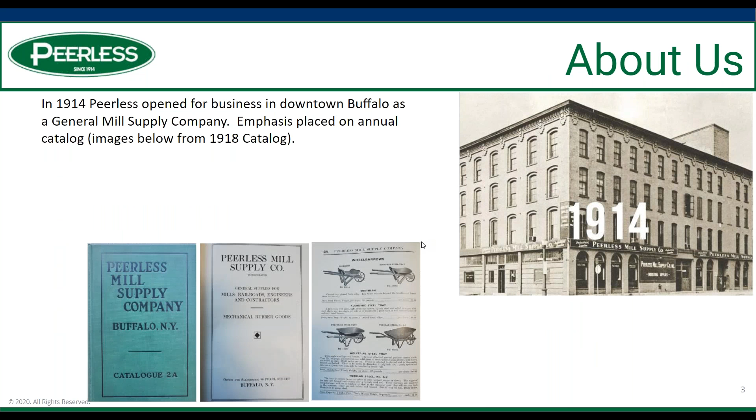Briefly, Peerless opened in 1914 as a general mill supply company, and of course we had to evolve with the times. We are ISO certified now. We've become a trusted source for process components.

We operate under three distinct divisions: our Peerless Process group, which really works with the plant environment, helping plants run smoothly and efficiently, always with a focus on better, safer, faster, cheaper.

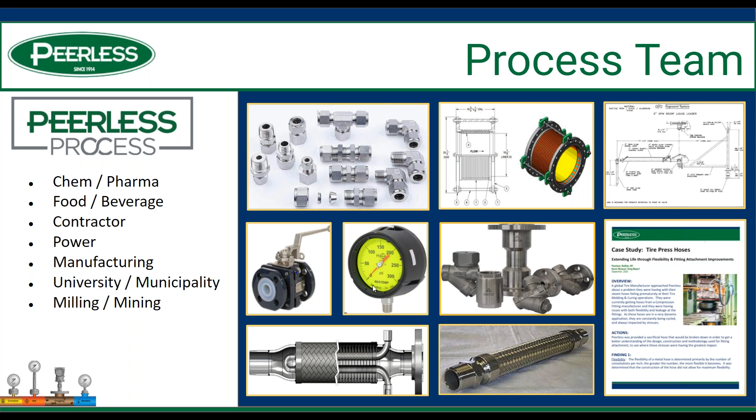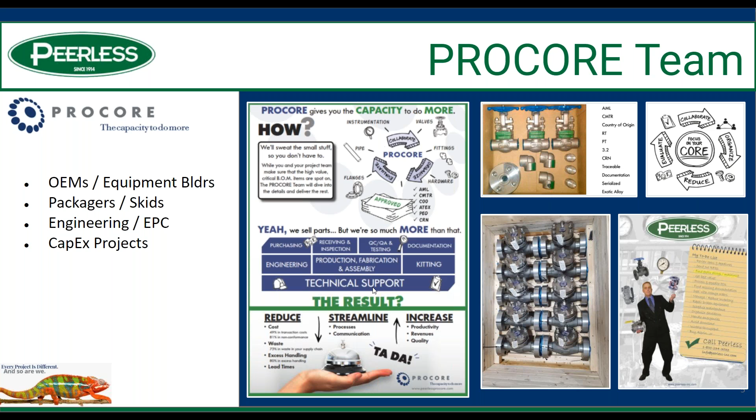We have our ProCore division, where we have a team of engineers that work with our OEM customers on very challenging projects that have many layers of specifications. And finally, we have our high temp fabrication division, where we do a lot of scientific surfaces, laboratory casework, and high temperature insulation.

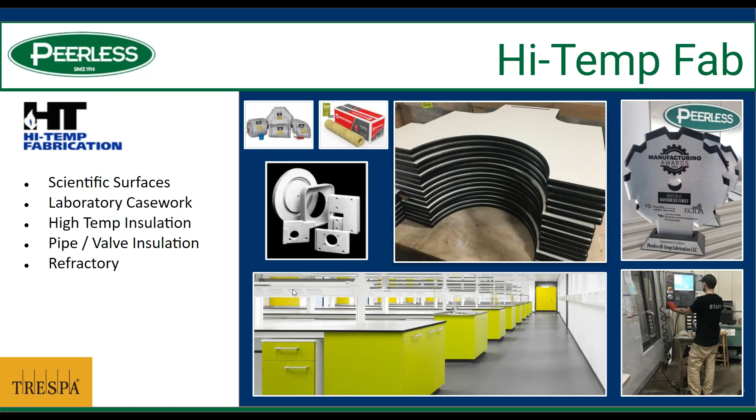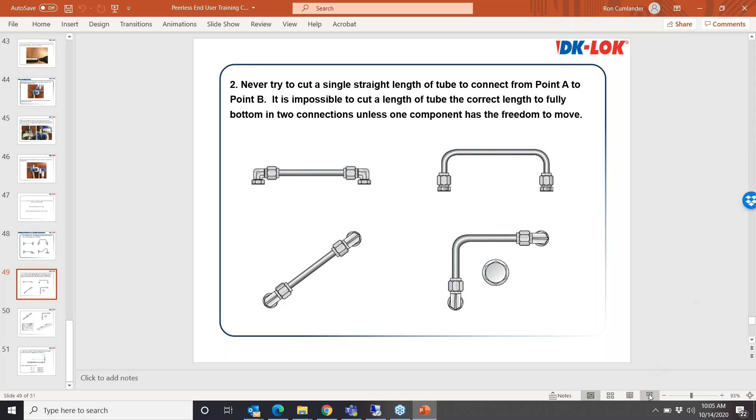I do apologize for not having provided Kevin a better mug shot there. Actually, I serve as Executive Vice President at DK-LOK here, and also handle their technical issues. So hopefully the information that I present to you today will be beneficial to you.

There's a world of information for this type of product, as far as the things that we're going to be covering today. So this is the basics. Feel free certainly to send your questions in to Dan, and we'll try to address those as we go through here.

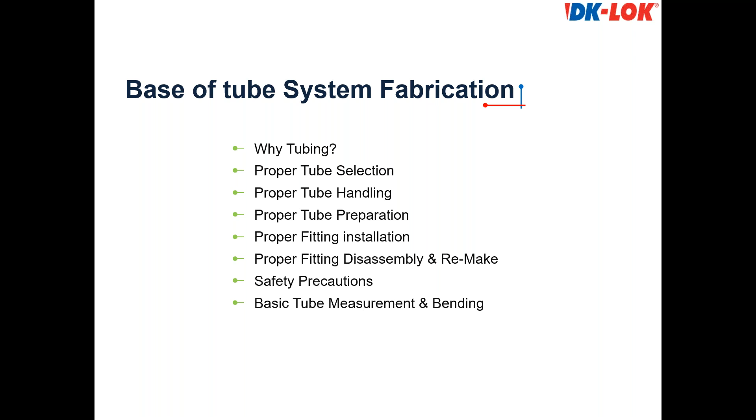The itinerary for today's meeting is why use tubing, proper tube selection, proper tube handling, proper tube prep, proper fitting installation, proper fitting disassembly and remake, safety precautions, and basic tube measurement and bending.

There are two types of instrumentation fittings out there on the market that are prevalent: a single ferrule design, as you see on the right-hand side, and the two ferrule design, as you see on the left-hand side. Both of these designs are available in 1/16 of an inch OD through 2-inch OD, and also the metric comparables of 2 millimeter through 50.

They, in the appropriate alloy materials, are heat code traceable. They are reusable from the standpoint that you can disconnect and reconnect the connections once they've been made up initially. Some of them present a gaugeable feature, and most manufacturers roll their male threads on their connectors for strength rather than actually machining them, especially in the 1-inch and under sizes.

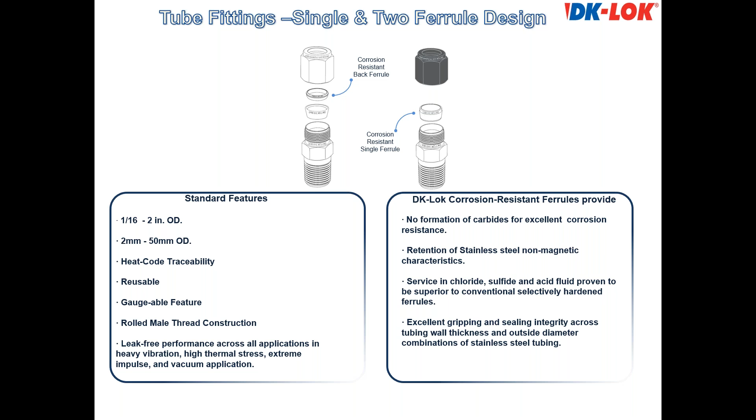Many manufacturers today provide their ferrules with some type of hardening process. Some have a hardening process that maintains the natural corrosion characteristics of the base metal. There are others that still use hardening processes that present some carburized material, and subjected in certain applications, such as salt spray or even Clorox bleach type entities, there could be some corrosion due to the degradation of the stainless characteristics of the metal. So that's basically what we have as far as these designs that are out there in the market.

More specifically, the two ferrule design is a geometric design. What you see here is the 4 components exploded in a male connector. There are specific angles for the particular parts because in this geometric design, all of these components are machined and designed to work together, just like the stem tip of a valve and the seat of a valve work together for complete shutoff. We'll talk about that a little bit more as we go through this presentation.

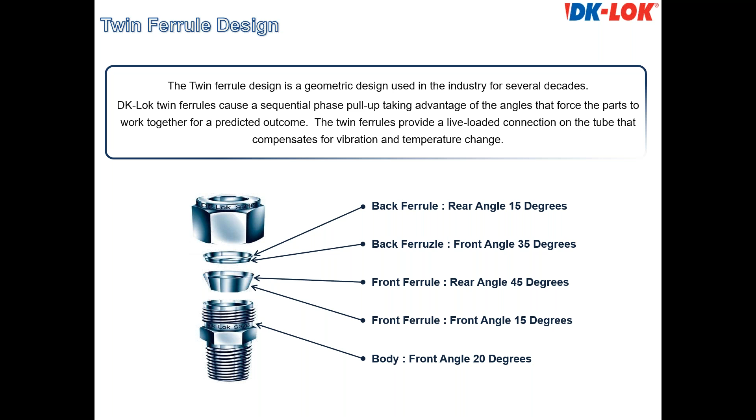In the installed position, the two ferrule design provides a live loaded connection that compensates for vibration and temperature change, which are the two main causes of leakage in any installation environment that tube fittings will be subjected to.

The single ferrule design is only a 3-piece component here. One of the reasons the nut is black is because it was found by the brand that made the single ferrule more prevalent back in the day, which was Parker Hannifin. This would be their CPI brand fitting.

They found that a moly-coated nut tended to do a better job of reducing the torque during the pull-up. So that's why you see a black nut on the single ferrule in some of my photographs, for that particular reason. Most manufacturers that supply a single ferrule do offer the option of an all stainless nut because a lot of customers, from a cosmetic standpoint, just don't like the black nut. So you can have either option there.

A lot of people ask us, what is the difference between single ferrule and two ferrule? I'll explain that by explaining how the single ferrule design works. It works by shear deformation. As you tighten the nut, it drives the single ferrule leading edge into the body bevel of the fitting. By sheer force and deformation, the leading edge of the front ferrule is forced to deform to match the contour of the body bevel of the fitting port itself. It works much like a cork being forced into the mouth of a wine bottle. The cork simply contours to the mouth of the wine bottle for a seal, and that is very similar to how the single ferrule design tube fitting works.

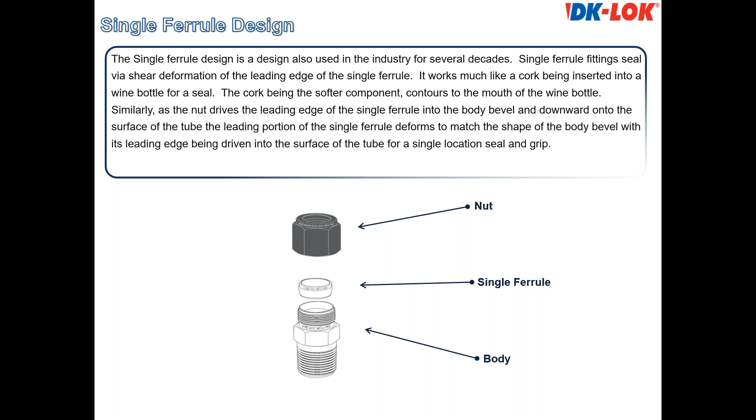The two ferrule design is much different. When these parts are finger tight, the fitting works by inserting the tube in tight against the shoulder, just as you would with the single ferrule. As you tighten the nut, it drives the back ferrule into the back of the front ferrule, which drives it into the body bevel, and through the tightening of the nut, pushes the front ferrule down the body bevel. Because it has a long, thin, tapered leading edge on the front ferrule, the deformation is minimal, and there's only a slight difference in angle between the body bevel and the front ferrule. So it's made to work.

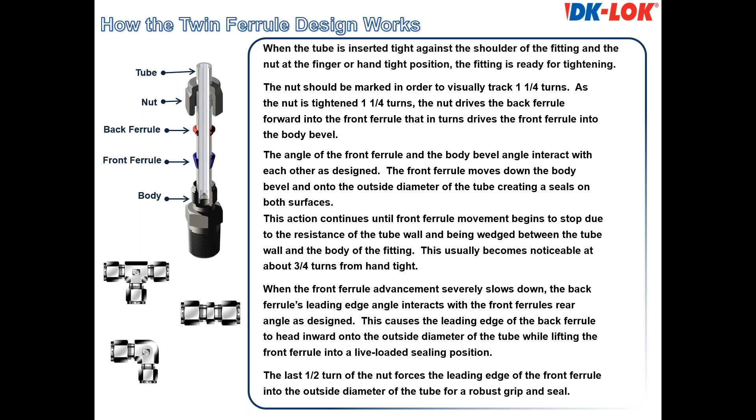Once the front ferrule's forward movement is retarded or stopped by being wedged between the body port and the OD of the tube, the back ferrule honors its leading edge angle and the angle machined into the back of the front ferrule, and dives inward onto the tube at a 45-degree angle to deliver maximum bite depth to seal against high pressure gas and provide grip against blowout. So the two ferrules work together very well, and in the installed position at 1 1/4 turns, it's a very live loaded position because the back ferrule lifts the front ferrule out into a complete sealing position against the body bevel itself.

Yes, sir. Just a reminder, you may want to use the laser pointer feature while talking about these, to point out anything while you're going through this. You got it, thank you.

Okay, I'll keep this down in the right-hand corner. Most manufacturers out there, especially for the two ferrule design, because of the controlled pull-up, the parts are predictable because of their dimensions, tolerances, and the travel on the threads. They use gap inspection gauges as a way for the installer to check for proper tightening. This is an example of a gap inspection gauge, typically referred to as a no-go gauge, and we'll talk about that further along.

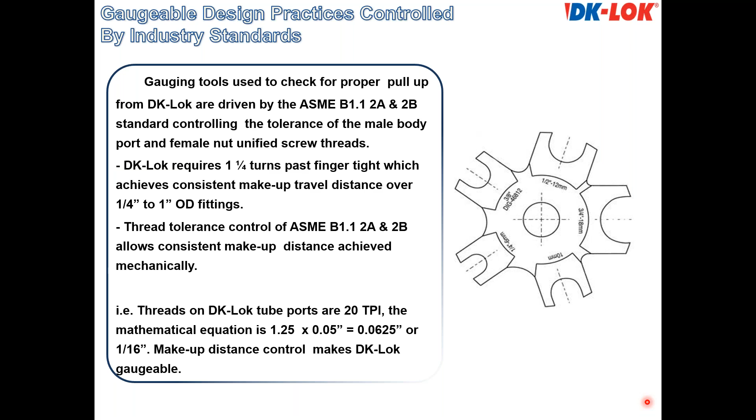We're still tightening the nut on both connections 1 1/4 turns, regardless of the wall thickness of the tube. So when the front ferrule stops a little sooner because of resistance in the heavier tube, and we're still going 1 1/4 turns, something has to absorb that change in travel, and the back ferrule does that. It receives that change in travel from the front ferrule by bowing or squatting as the nut continues to drive it forward to the 1 1/4 turn position. So the installation procedure does not change for the various wall thicknesses available for any specific OD.

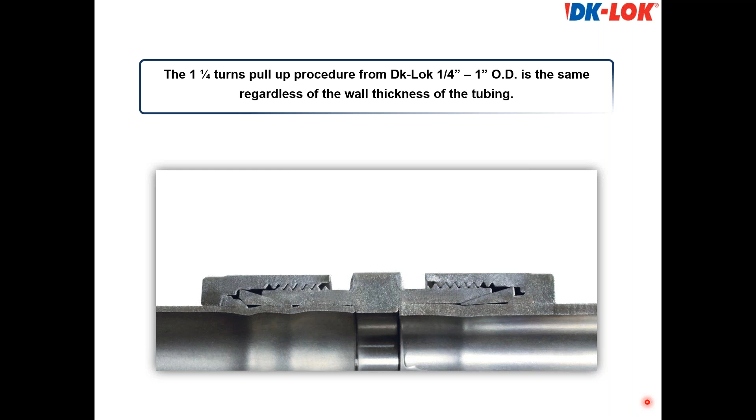So through the pull-up, we want to close the gap between the body bevel and the front ferrule, and maximize this sealing area as much as possible. Through another 1/4 turn on the nut, we're continuing to force the front ferrule down the body bevel and onto the OD of the tube. At the 1/2 turn, if we were able to disassemble this and take a look, the back ferrule is not even attached to the tube at this point. It's simply acting as a bearing disc or thrust washer to take the torque out of the pull-up and push the front ferrule forward.

At 3/4 of a turn, we're continuing to move the front ferrule down. We continue to move the front ferrule down, and about 3/4 of a turn, based on the wall thickness of the tube, is about the time during the pull-up that the front ferrule starts to really stop its forward movement because it's being wedged between the OD of the tube and the body port.

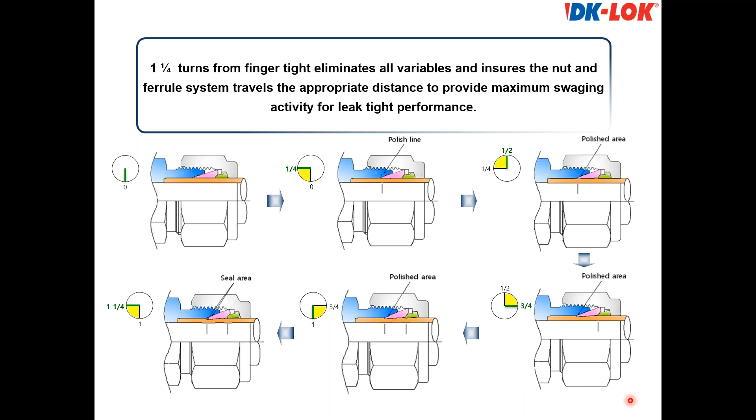So we need to complete that, and that last 1/4 turn is what really delivers the bite depth and the grip of the back ferrule into the OD of the tube, drives it under the front ferrule to lift it outward in a live loaded position against the body port. So that's basically what takes place during the pull-up of the 2 ferrule design fitting.

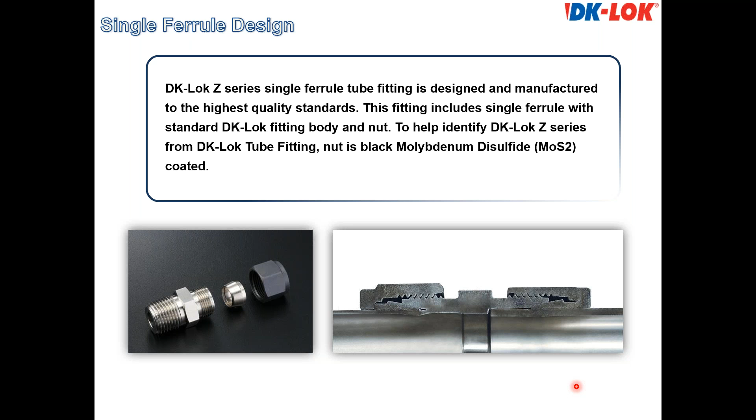Over here, it looks like the ferrule is kind of flattened and straightened out, much like the front ferrule of a 2 ferrule design, because this tube wall is so heavy, it's giving much more resistance, and it just basically stops the forward movement quicker and kind of flattens out that arc in the single ferrule. So that's the difference between the 2 ferrule and the single ferrule design. They both can be used on various wall thicknesses, but by far, the 2 ferrule design is the most prevalent and the most dominant preferred design in the field globally today.

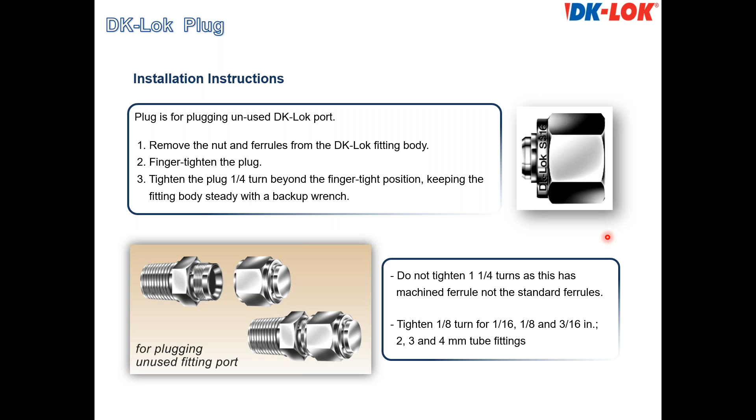So you just take this plug, screw it onto that unused port to the finger tight position, and with the proper wrenches you would tighten that plug a quarter turn, and that would seal off that port and allow that T or that unused branch line to be available if you wanted to reconnect in the future. So again, we plug a port and we cap a tube. That's the verbiage used in our industry. Again, we cap a tube and we plug a port. So that'll help if that confuses anybody.

Hey, Ron. Yes. Sorry to interrupt.

Just a quick question, or maybe more of a point of clarification on the pressure rating chart you showed a couple of slides earlier. Before we get too far past it, maybe you can work back. So just to clarify, the tube fittings you'd be using alongside tubing of a particular OD and wall thickness—the tube fitting itself is designed to meet the maximum possible working pressure that the tubing it's coupled with is rated to. Is that correct? Okay, that's an excellent question.

We get the question all the time of what pressure rating your fitting is rated to. And the way to answer that is simply this: our fitting is rated to the working pressure of the tube and will hold to the burst of the tube when properly installed in accordance with manufacturer's instructions. But to rate the fitting's pressure depends on the connection ports in that configuration.

So let's say you've got a half inch tube by half inch female NPT straight female thread connector. Even though the compression side would be rated to 6,200 PSI with a 4-to-1 safety factor, the lower rated end connection would be the half inch female NPT. So you have to rate the fitting's capability to the lowest end connection's pressure rating.

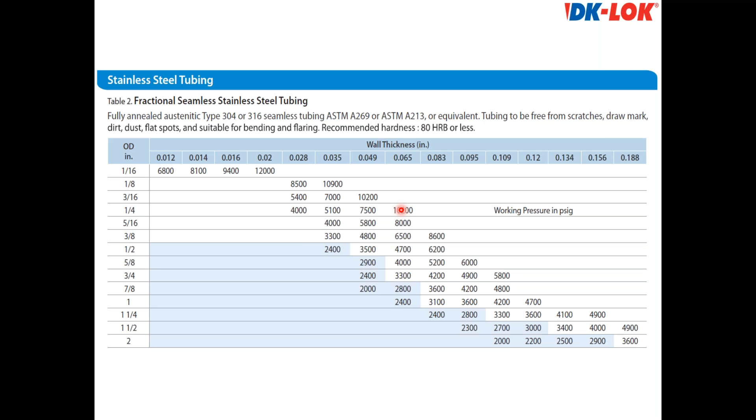Back to these pressure ratings, a 1/4 inch union T with compression all the way around would be rated to 10,200 PSI because all 3 compression ports would be rated to the working pressure of the tube. But a female branch T with compression and 1/4 inch female NPT would be rated to the NPT pressure rating for 1/4 inch female NPT in stainless steel. So the fitting is always rated to the lowest pressure rated end connection on the configuration.

Thanks, Ron. Here's another adapter that will make your life much easier. It's called a port connector. It's machined from bar stock, and because it is bar stock, it has the same hardness as the ferrules, since they're machined from bar stock as well.

So for the ferrules to perform properly on the port connector's tube stub side, a simulated groove is machined into the port connector so the leading edge of the front ferrule will find that groove as a home and seat into it, and the front of the ferrule will stop on that shoulder. The purpose of a port connector is simply to allow you to connect 2 compression ports very close together to save spacing, without going through the frustration of cutting a very short piece of tubing.

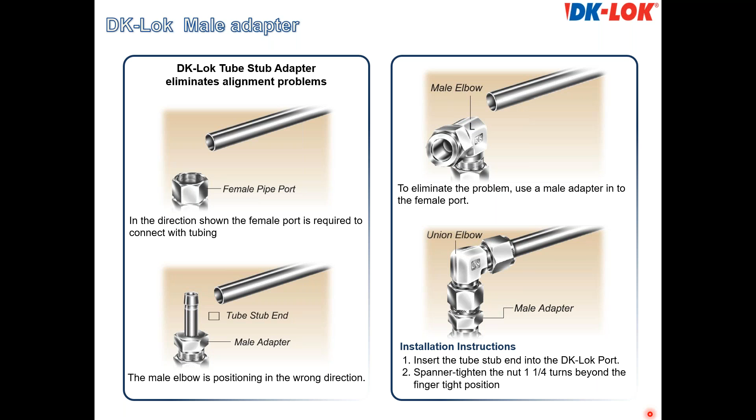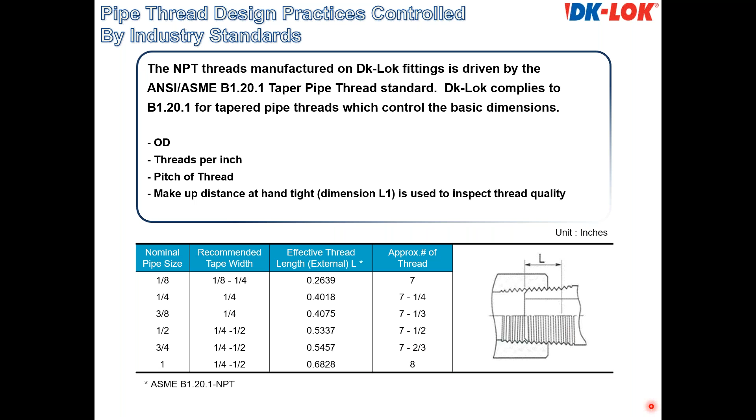NPT threads are dictated by specifications, ANSI and ASME B1.20.1 tapered pipe thread spec. For 1 inch and below, most all tube fitting manufacturers cold roll their threads—they don't machine or cut them, but form them through thread rolling machinery and hydraulic pressure. It's pretty straightforward. The important thing about cold rolled NPT threads is that they're formed properly.

The way NPT threads seal when mated together is they seal on the flank. This would be considered the crest, which I call the mountaintop. This is the root, which I call the valley. And this is the flank, which I call the slope. As long as NPT threads are made to spec, with the crest truncated off flat and the valley also truncated off flat, NPT threads typically don't give you any problem because they seal by interference with each other on the flanks.

If you don't have properly truncated threads, those little tips, if too pointed, will hit into the valley of the mating thread, and those thin tips in stainless steel will heat up quickly, and that port will gall immediately. Stainless steel is a little finicky, so it's really important that high quality threads be produced on compression fittings, properly formed so you don't have galling issues whatsoever.

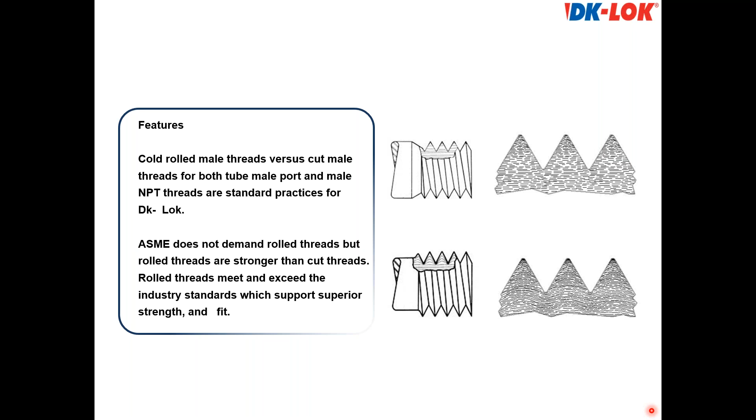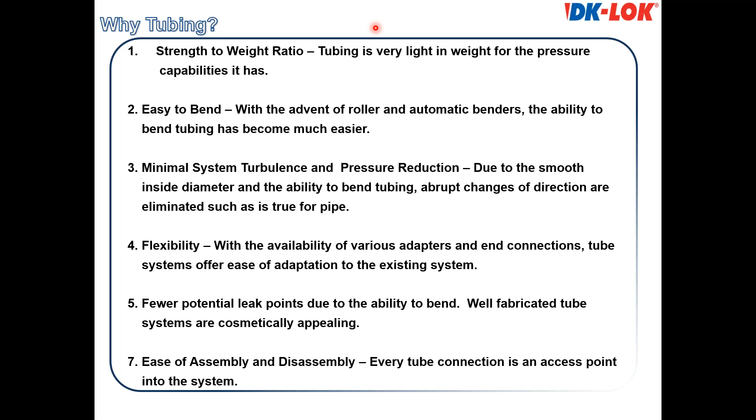And the flexibility of the system—you can adapt with Teflon braided hoses with tube stub ends and go right into a tube T and a tube system, and go to a hose easily. You have fewer leak points, and then you always have maintenance: you can make and break and disconnect on every nut and ferrule connection in the system and access it to do whatever you need from a maintenance standpoint. But back to the comparison to pipe.

Here's an example, and this piping comparison actually shows a sweeping 90 rather than an abrupt 90. I wish I had an abrupt 90 in this picture, because that would further emphasize that when you have abrupt 90s in a piping system, those cause pressure drop. Sweeping elbows don't tend to cause pressure drop, and with tube, you can bend it without needing so many fittings and leak points.

If this were a welded system versus tubing, you would have to have a burn permit, a skilled welder, and in some cases, you'd have to have x-ray. Then you sometimes have to do flushing. You have to do all types of things if this were a welded system.

In small bore piping systems, because we have tubing and tube fittings available up to 2-inch, our larger fittings, 1-inch and above, are great cost savings alternatives to small bore piping systems that are welded or even threaded. If you can bend conduit, you can bend tubing, and tubing is much easier to field route anyway. So there's a lot of advantages in using tubing versus pipe, especially in small bore piping systems.

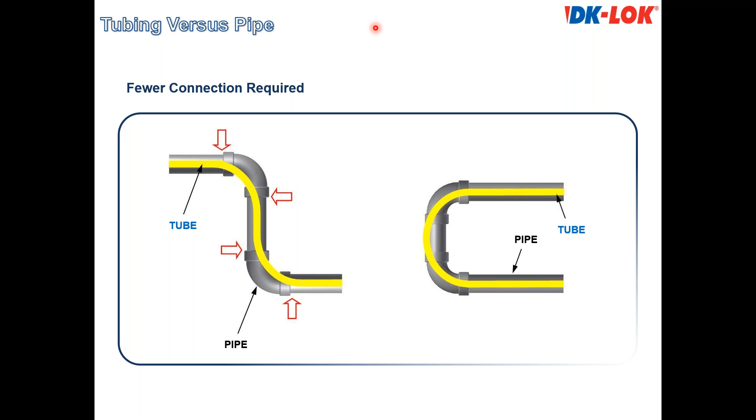When selecting the proper tubing, you have to take a few things into consideration: the proper material—stainless steel is by far the most common material we deal with—the size, and the wall thickness for your pressure requirements. Every manufacturer lists suggested ordering information for the material you may be considering. For stainless steel, it's fully annealed, 304 or 316 seamless, A269 or A213.

You always want to make sure it's free of scratches and flat spots. Everybody recommends RB80 or less, not because the fitting won't work above RB80—most manufacturers will state their fitting will work to RB90—but the reason we recommend RB80 or less is simply from a workability standpoint, to be able to bend and work with the tube to create your systems. It just makes fabrication easier if it's RB80 or less.

One thing I'll mention before leaving this slide: there is no problem using welded tubing with compression fittings, so long as the welded tube is welded and drawn. What I mean is, so long as there's no weld bead or seam on the tube that would cause it not to be 360-degree circumferentially round, because round ferrules can't seal on out-of-round tube, or on tube with a weld bead that isn't drawn out to keep it perfectly round and concentric.

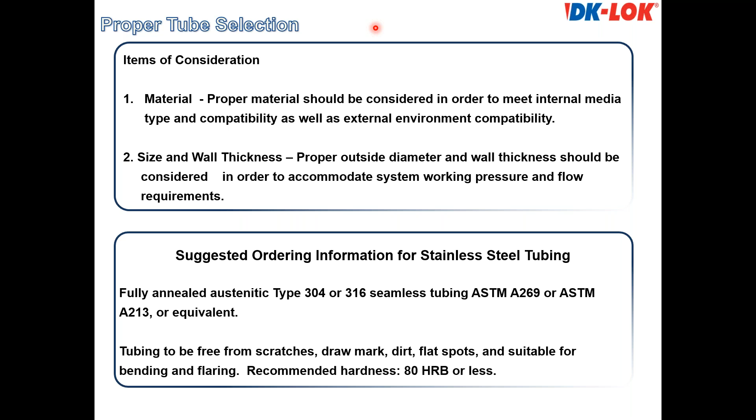The other thing to consider is that tubing is not pipe—it cannot take the abuse that pipe can take. You need to be very careful to protect the OD of the tube, such as dragging it off a rack, letting it hit the ground, laying it on gravel, concrete, or slag on a construction site, or letting forklifts run over it. At all times, you need to protect the OD of the tube, because that's where the ferrules seal.

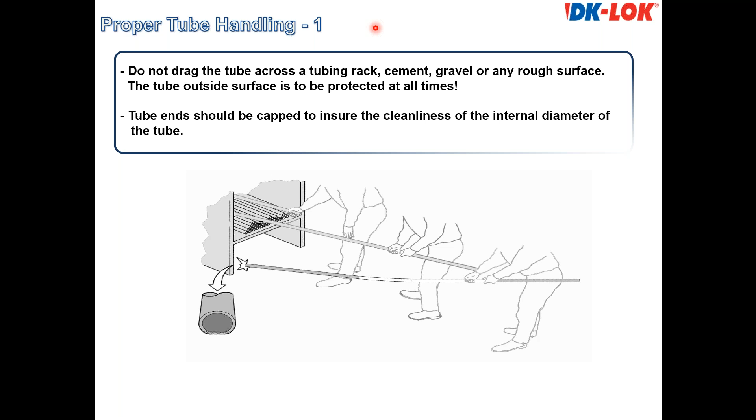If there's a deep scratch right in the area where the ferrules may be sealing, you would have a leak point that is not any fault of the fitting itself, such as this right here. I've been on many construction sites over the years, and I've been surprised at how a fitting could perform leak tight given some of the things I've actually seen in the field. So again, while tubing has many advantages over pipe, it is not pipe, and it cannot take the abuse that pipe can take.

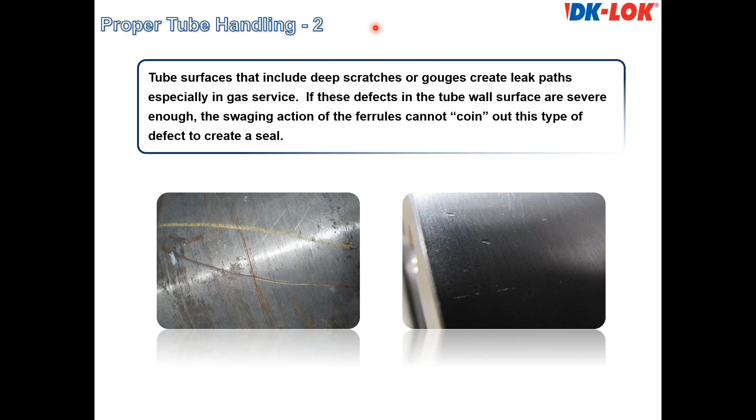Tube end preparation is very important—we need to prepare the end of the tube properly, whether you do that before or after you bend it. The basics for tube preparation are to cut it as squarely as possible. The most common method out there is a hand tube cutter, though there are other methods.

Once you've cut the tube, or even during cutting, don't be too aggressive with the cutting wheel, because even though we call it a tube cutter, it does not cut or remove any metal at all. It simply separates and divides the metal on either side of the wheel as it travels 360 degrees around the OD. So don't be too aggressive—tighten the handle on the tube cutter about 1/8 of a turn, then make a couple of rounds to make sure you've made the cut for that adjustment.

Snug the handle on the tube cutter another 1/8 to a quarter turn, 2 or 3 more rounds to make sure that you've maximized the cut for that adjustment. Just take your time and don't get too quick or too rushed in cutting the tube.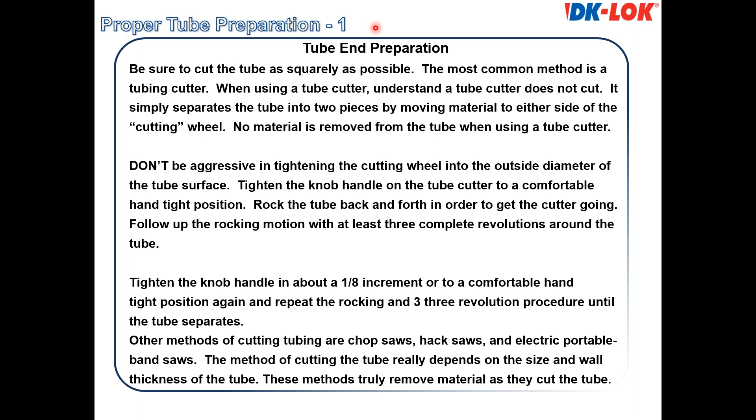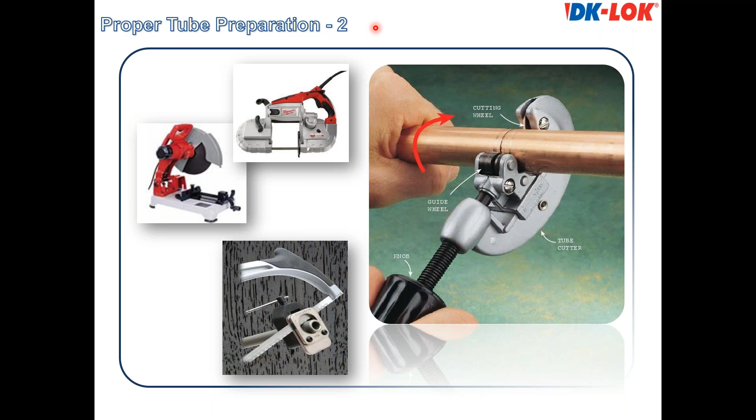Here are some photographs of the different methods used to cut tubing: a tube cutter, a Porta-Band, an electric saw, and even a hacksaw with a hacksaw guide to try to get it as square as possible. But in all cases, no matter what method you use to cut the tube, you need to always deburr the ID and the OD of the tube.

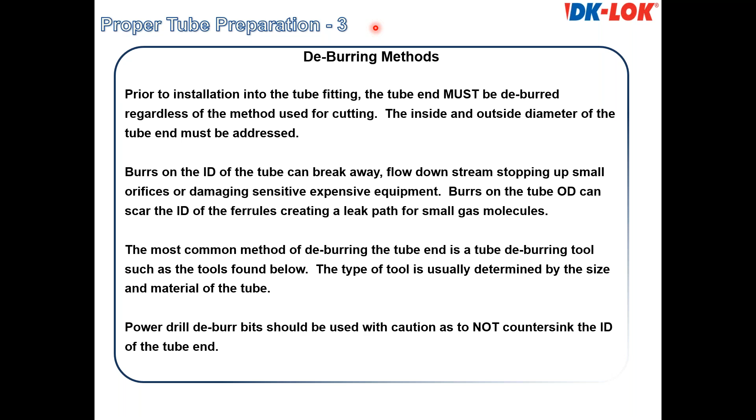The reason for that is because burrs, whether they're on the ID or the OD, can flake off, go downstream, stop up very small orifices, or damage very sensitive equipment. So here are several ways of deburring tubing.

You can see an example here of a piece of tube that was obviously cut with some method other than a tube cutter, because it's got that big pigtail right there on the end that needs to be removed. You can use various types of deburring tools here.

I would caution you about this particular method being installed in the end of a power drill, because if you get too aggressive driving this into the ID of the tube, you can actually bevel and change the entire shape of the end of the tube. You need that to be good and flat, with the full wall thickness, so that the tube will dead stop into the shoulder of the fitting.

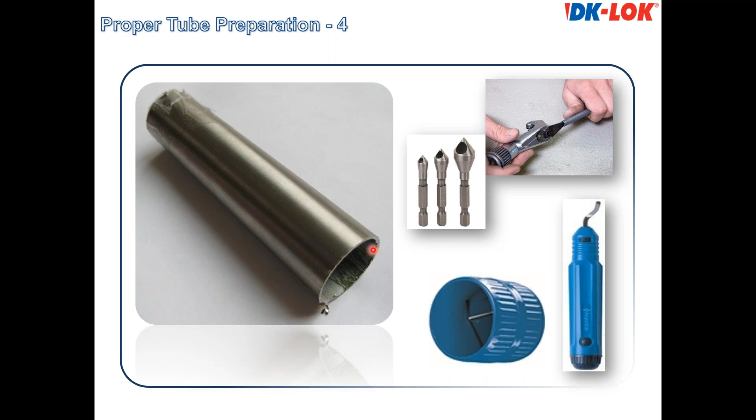And the ferrules have a stationary target during pull-up so that they deliver their maximum sealing and gripping action as designed to do so.

Okay, we've been talking about the installation of the tube fitting, and we've talked about tube prep. Again, the basics are: once you've prepared your tube, cut it off square, deburr the ID and the OD. You need to insert the tube in tight against the shoulder of the fitting to make sure that it bottoms out fully.

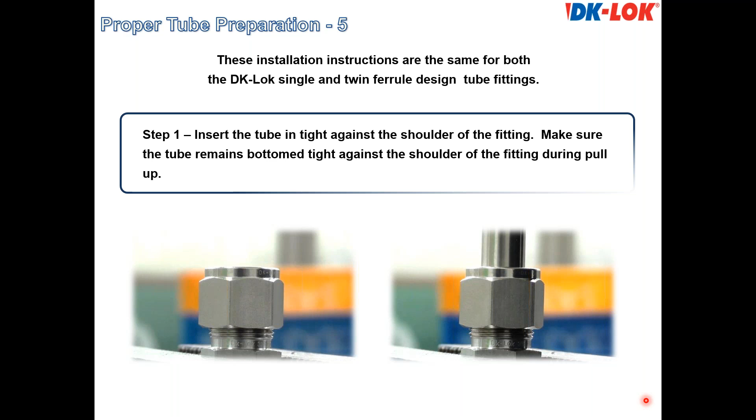Then mark the nut. After you have tightened the nut to the finger or hand tight position, mark the nut with a visual aid—a Sharpie is a tube fitter's best friend—for a visual reference for 1 1/4 turn pull-up.

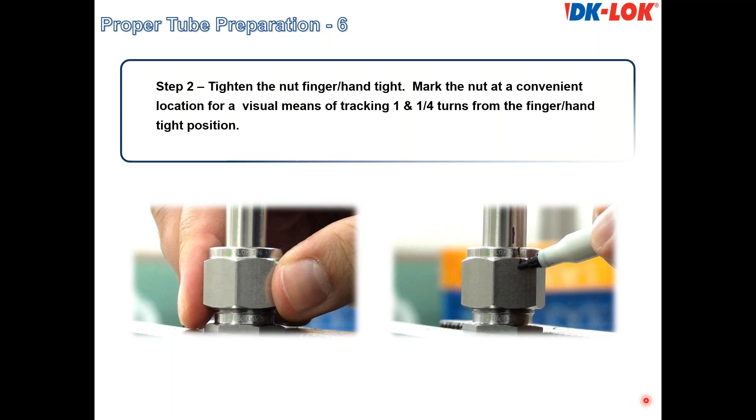Using a wrench, you need to hold the fitting body steady with a backup wrench and tighten on the nut only. If you were installing a union in a tray and connecting 2 tubes together, you need to hold the center body hex of the union and tighten one end of the union at a time. Do not tighten each end, because you need that body to be steady, and you need the nut to travel specifically 1 1/4 turns for proper pull-up.

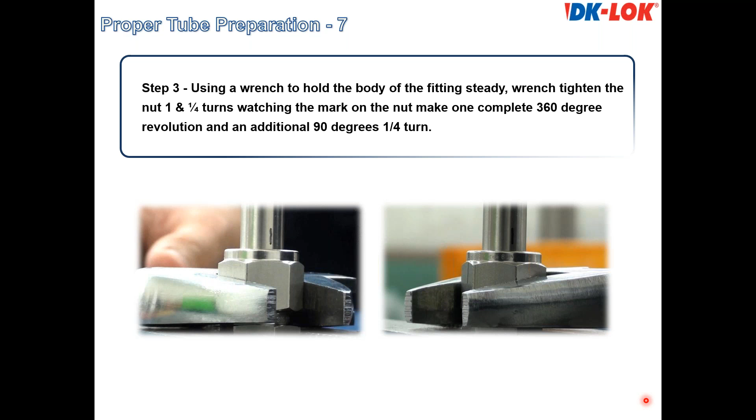So right here, let me turn my laser pointer off, and I will play you a little video that will show you the assembly.

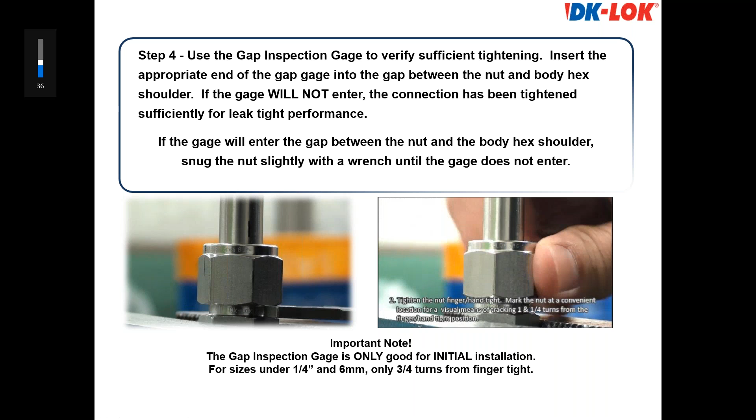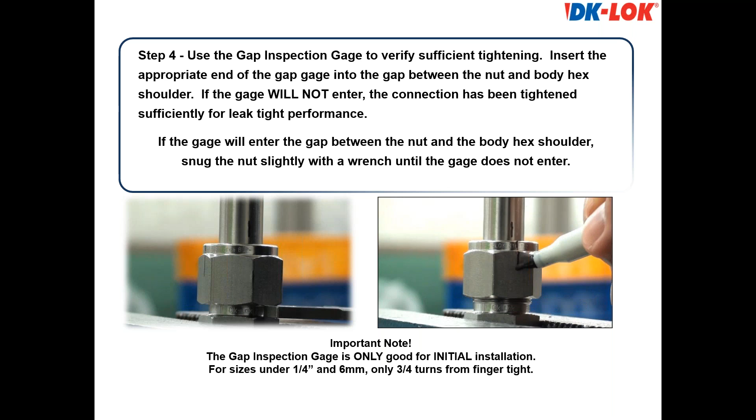We've inserted the tube in. We've tightened the nut down hand tight. We're going to mark the nut for a visual reference so that we can keep track of the number of turns. Now, he marked the tube—you can do that if you like. Basically, the nut is the important thing right here, because the tube will remain perfectly still during the pull-up.

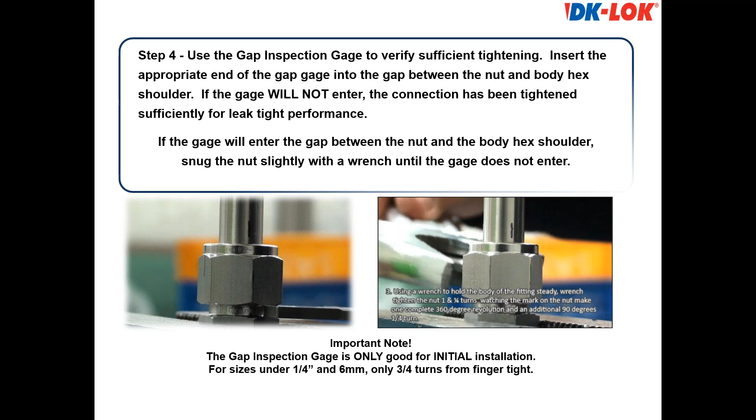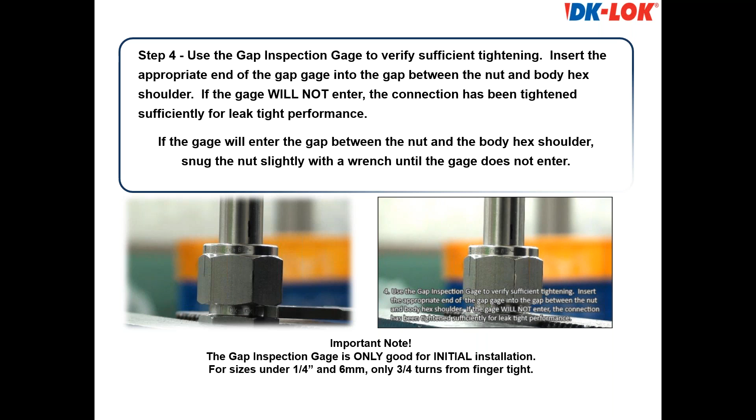You want to watch that mark go a complete 360 degrees for 1 revolution, and then continue on another 90 degrees for 1 1/4 turn pull-up. Once you've gotten to 1 1/4 turn pull-up, you can then use the no-go gauge and insert it between the nut and the shoulder of the fitting to check for proper tightening. If that gauge will stick or go in slightly, you need to snug that nut just a little bit to prevent the gauge from going in.

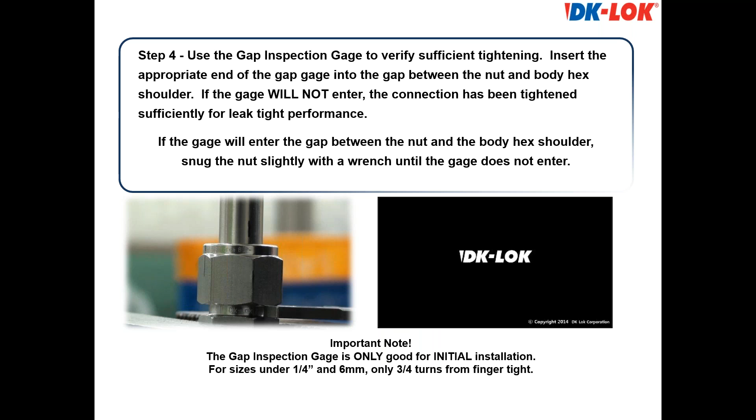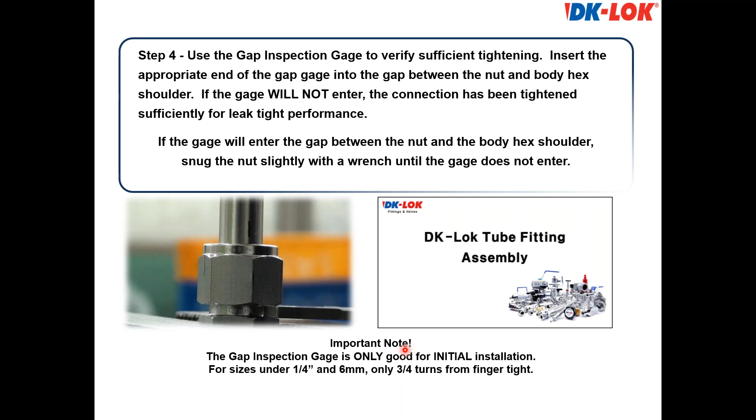Another feature that is available on some manufacturers' fittings—I don't know that all of them do this, but we and a couple more that I do know of—provide stop collars on their fittings. What the stop collars will do is eliminate all the guesswork in the installation of the fitting as far as tightening the nut is concerned.

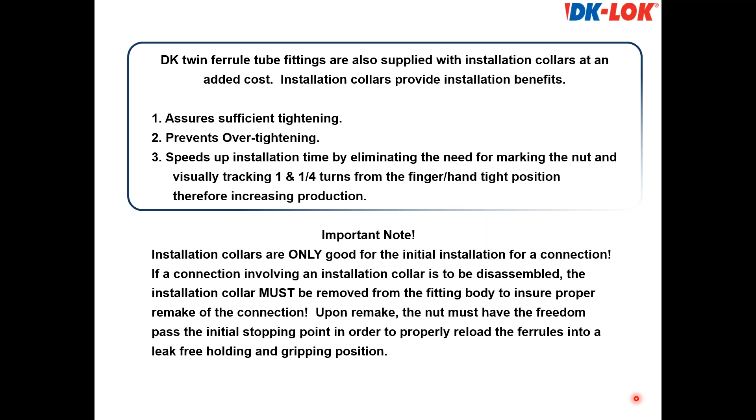You would simply tighten the nut until it dead stopped that stop collar, and you could not rotate that stop collar with your finger. At that point, you're at 1 1/4 turn pull up. You cannot over tighten the connection, nor will the connection be under tightened at that point.

Now, this is an additional cost to the fitting, but it can do a couple of things for you. It can take all the guesswork out of installation. It can speed up productivity for making tube connections, and it can prevent over tightening and under tightening.

When you go to disconnect a connection that has a stop collar on it, it is very important that you understand that for remake of that connection, you need to remove the stop collar from the fitting port before you insert the pre-swaged nut and ferrules back into that port for reconnecting. The nut always needs the freedom to travel some fraction past the initial stopping point to complete the installation, and if the stop collar is still on the fitting body, it cannot do so.

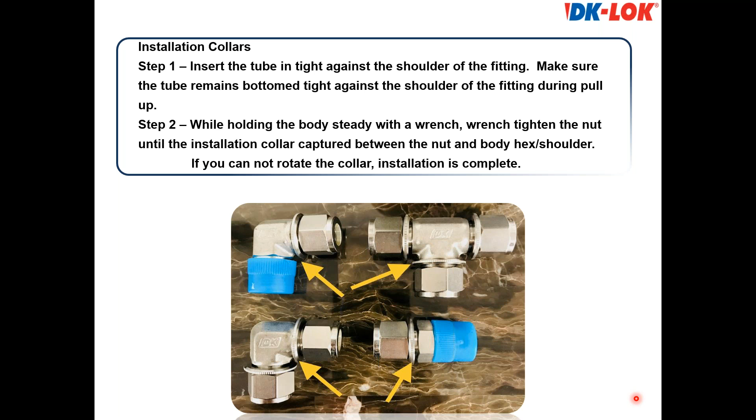For our larger sizes, 1 1/4, 1.5 inch, and 2 inch, it is a requirement that you use a hydraulic or an electronic pre-swaging tool to preset the large, bulky ferrules and nut onto the tube. Once you've done that, you take your tube with the preset nut and ferrule system, mate it with the body of the fitting, tighten the nut down hand tight, and then with wrenches, tighten the nut 3/4 of a turn to complete the installation.

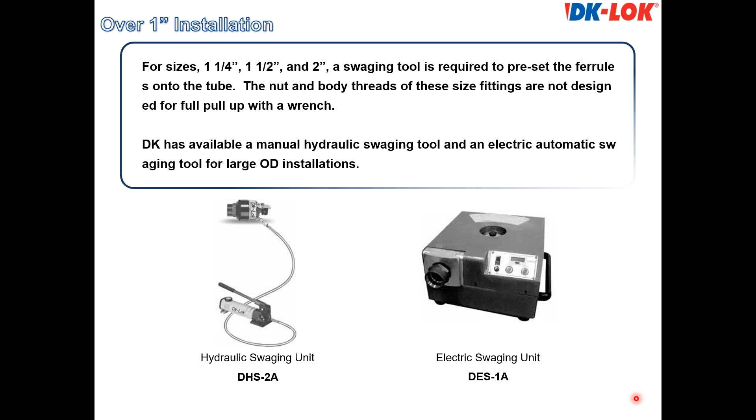The hydraulic and electronic swaging tool is not limited strictly to the larger OD sizes. There are jigs and dies from 1/2 inch all the way through 2 inch. So if you're in a situation of high production in smaller sizes, you could use either one of these tools to speed up that process and to assure proper installation, taking a lot of the heavy work out of it, especially if you're using maximum wall tubing in those applications.

Okay, we're pushing for time, and I'm trying to rush here. Let's talk about some tube bending real quick.

When you're bending tube, the 3 things that are very important: measure exactly, bend as accurately as possible, and always use the center line for your measuring, the center line of the tube, from point to point.

There are 2 ways that typically people will measure. Some people will start at one end of the tube and mark all of the bends on that tube, cut it off, and then bend every mark. Those are very experienced fitters.

I have seen guys on construction jobs, especially in a pulp and paper mill, where they're running lube lines from one floor to another, take a piece of wire or clothes hanger or a paper clip and simply bend that piece into the exact shape of what the tube has got to look like to connect these 2 terminal points, then make all of their measurements, mark that tube off, and bend it exactly in the shape of that preformed wire, and stick it right up through that paper machine floor, and it fit perfectly. So again, it's an art.

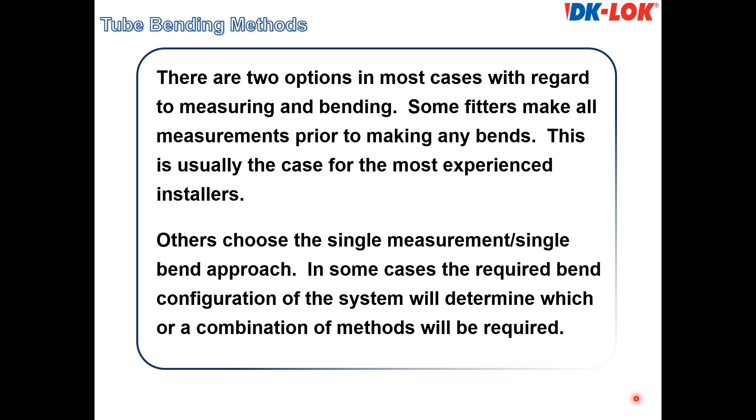The other way to do it is to mark and measure, then measure from that bend to the next bend, mark that one, and then bend that one. So it depends on the guy doing the bending as to what he's most comfortable with based on his experience level. Those are the 2 methods that typically take place.

There are 4 things that are important to tube bending: a reference mark, which you need to identify as which end of the tube you started from. So you need to always identify the reference mark. The second one is a measurement/bend mark. That's where you would mark the tube for where that bend needs to take place.

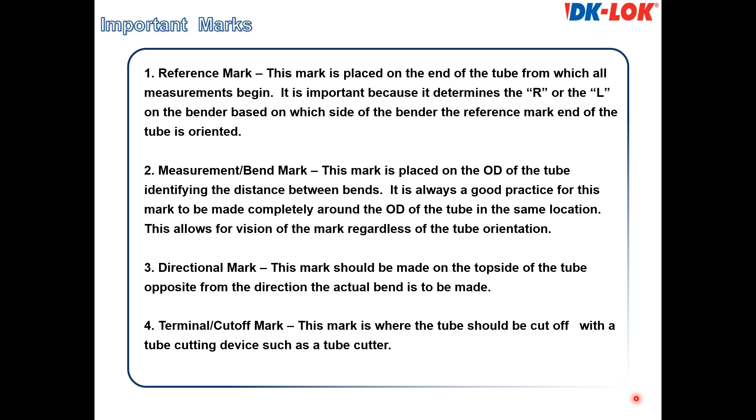The next would be a directional mark. The directional mark will allow you to keep up with which direction you need to make the bend in. So the directional mark goes on the top of the tube once you insert the tube into the hand bender, so that you keep up with the direction of the mark. And then the last mark, of course, is the terminal cutoff mark.

One of the things you have to deal with in bending tubing is gain. When you bend a 90-degree bend in tubing, that is a sweeping elbow rather than an abrupt 90-degree right angle, the tubing grows in the direction of the bend. So if you have no bends prior to the first mark and you're going to bend a 90-degree bend, there is no consideration for the gain.

If there's any bends prior to the next mark on the tube, based on the degree of bend, when you make that next mark you have to adjust out the gain at that point. Typically it's about an OD gain. So if you bend a 90-degree bend for 1/4 inch, the gain will be about 1/4 inch, same for 3/8 and same for half. For a 45, it would be half of that, so 1/8 in 1/4 inch, and so on. We have to adjust for gain.

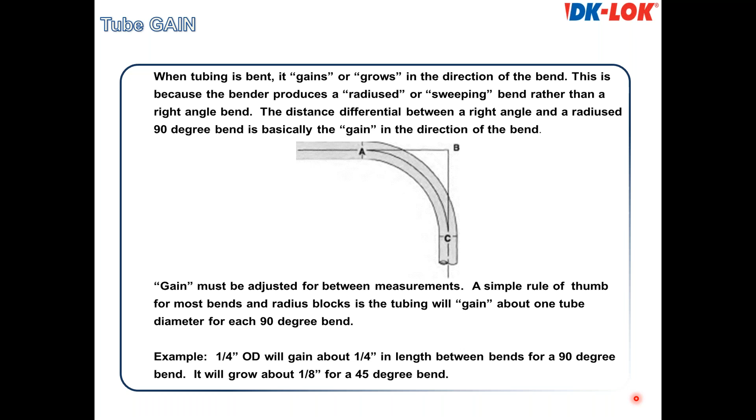Here's the reference mark I referred to. You'd want to ID which end of the tube you started in making your measurements. The measurement or bend mark is where you would actually be making your bend. When you insert the tube into the bender, you align this measurement mark onto the 45 for a 45-degree bend, or onto the R if your reference point is to the right of the bender, or under the L if your reference point is to the left of the bender. In most cases people feed the tube to the left, so the most common alignment would be for this measurement mark to be under the L.

Sometimes when you're bending 90s back to back, you may not be able to continue to feed to the left, and you have to flip the tube around to make the next bend. That would be when you make the measurement mark under the R, because your reference mark or the end of the tube you started from has now moved to the right hand of the bender. In a 45, it doesn't matter which side of the bender the reference mark or beginning point of the tube is, because you're going 45 degrees.

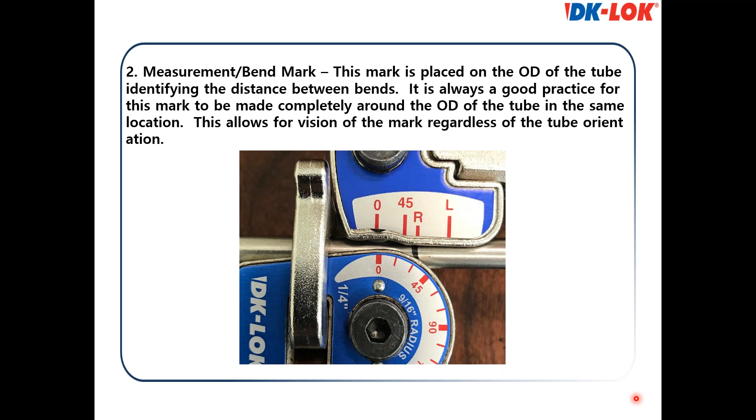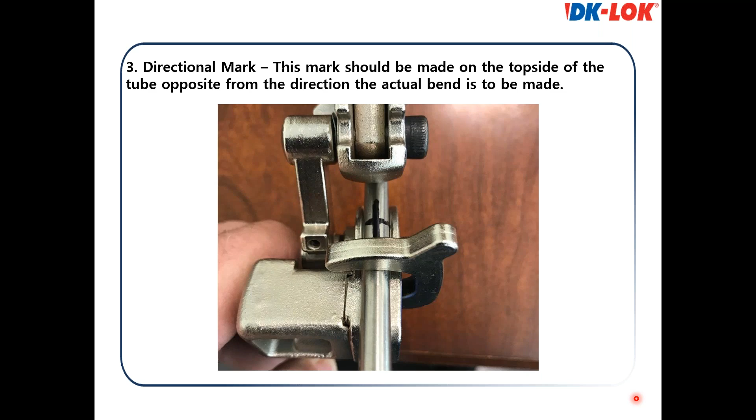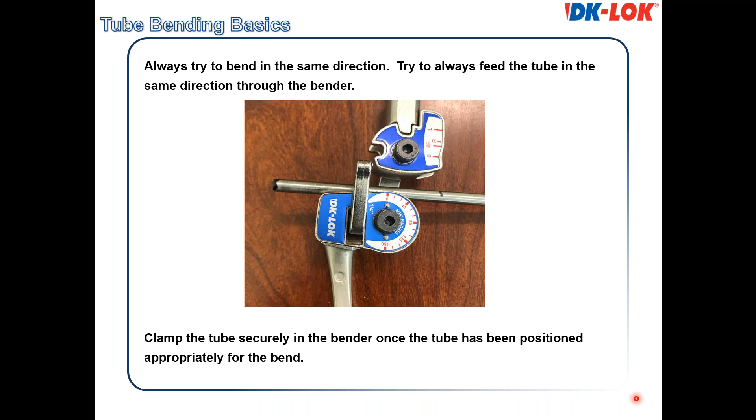The directional mark is a longitudinal mark over the measurement mark that tells you to bend straight down from where this measurement mark is so that your 90-degree bend will be in the proper plane. That's what the alignment mark is for. And then, of course, the terminal cutoff point. Always try to bend in the same direction, although a lot of times it's not possible. Typically the common practice is to feed the tube to the left, align your marks, and then make your bend. Here's the alignment mark for the bend, and on the right hand side you see where you need to align your measurement marks based on the angle you're bending and where the reference point is located in relationship to the bender.

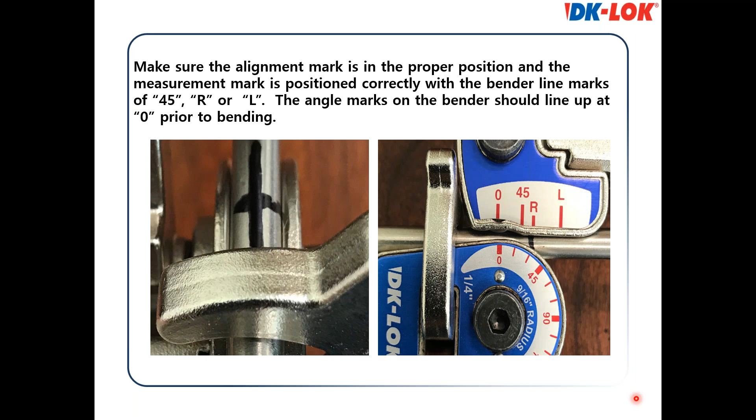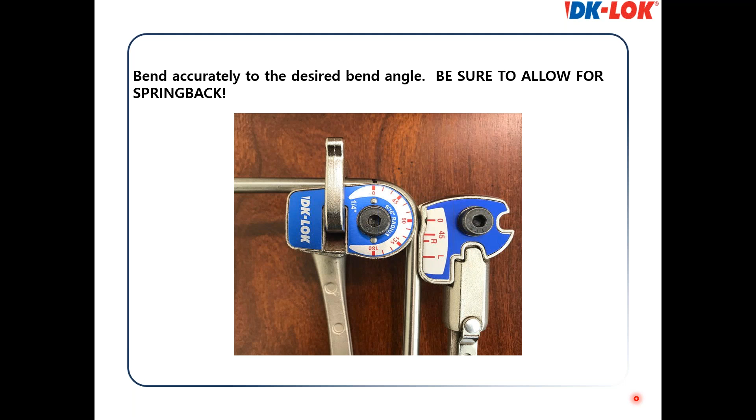Bend accurately and be sure to allow for spring back. If we're bending to a 90-degree angle, bend specifically to 90, and then when you take the pressure off the bender, you're going to see that bottom leg, that vertical leg, spring back 3 to 4 degrees. So you have to adjust for that spring back, and you need to do that very carefully and in increments. Do not overbend, because that 90-degree section where we've bent the tube is much harder than it was originally, and it doesn't deform well a second time. It'll be very hard for you to straighten that bend out so that your connections will work out properly. Don't overbend. After you've bent the tube, you can verify the bend angle using a tape or a ruler. There's a lot of tools for you to check your accuracy.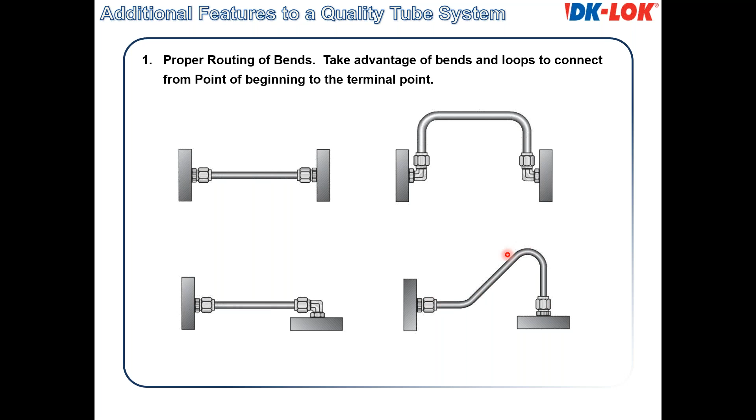Proper routing of the bends: on the left, you see a situation you do not want, because it's very difficult to cut a straight length of tube that would bottom out in both connections. If one end of this is not free for you to slide that nut and ferrule and fitting onto that straight tube, it'd be very difficult to even make this connection at all. This would be the proper way to make the connection so that you have access for maintenance going down the road. Again, same thing here, no straight sections. Take advantage of an expansion loop to allow access for maintenance. Instead of this, we want to use what I call a jumper.

This is critical for bending. If you miss the center line dimension from this port straight across to this port, and if you're short, then your legs are going to be off this way, and that's going to be hard for you to get the tube into these ports.

If you are overshot on this distance, now your legs are going to be angled inward and you may not be able to bottom the tube out. So again, measuring it accurately and bending accurately is very important.

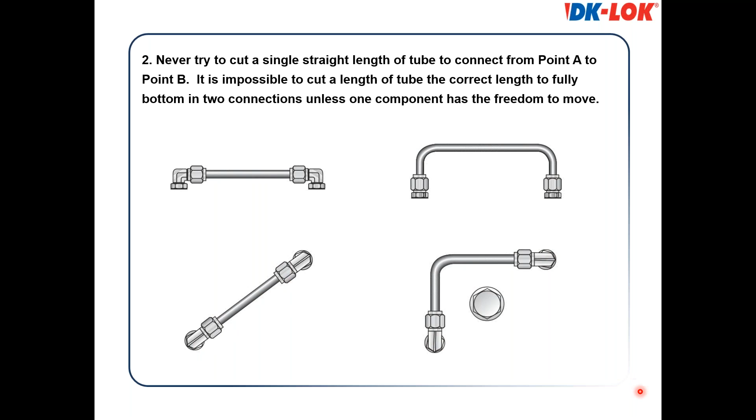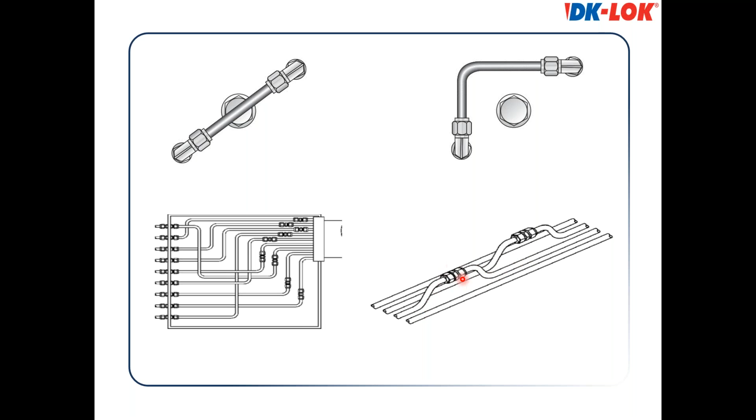This would be an example of tube runs in a tube tray. You use expansion loops to raise the unions up out of the tube run. So again, access for maintenance with your wrenches going down the road.

Proper tube support. There are all kinds of ways to support tubing. These are the polyethylene halves with the stainless brackets, plates, and bolts here to support the tube properly. There's single line clamps, there's double line clamps, there's gang clamps, there's all types of ways to properly support your tube.

And then the proper support distances for each OD size is listed here. 1/4 through 1/2 every 3 feet, 3/4 through 7/8 every 4 feet, 1 inch every 5 feet, and then 1 1/4 and up every 7 feet. So we've made it, and that concludes my portion of the presentation, and I appreciate your time and attendance.